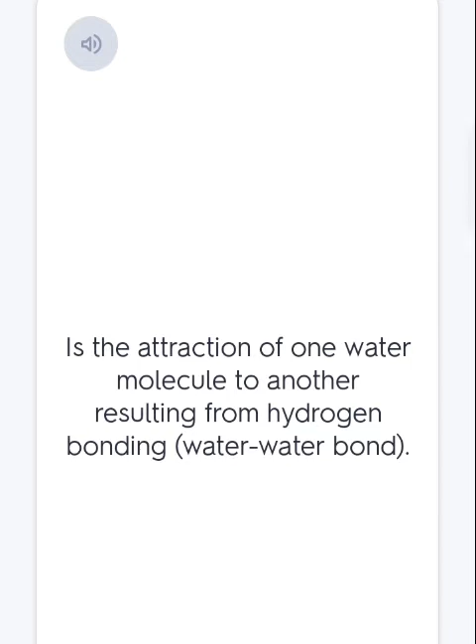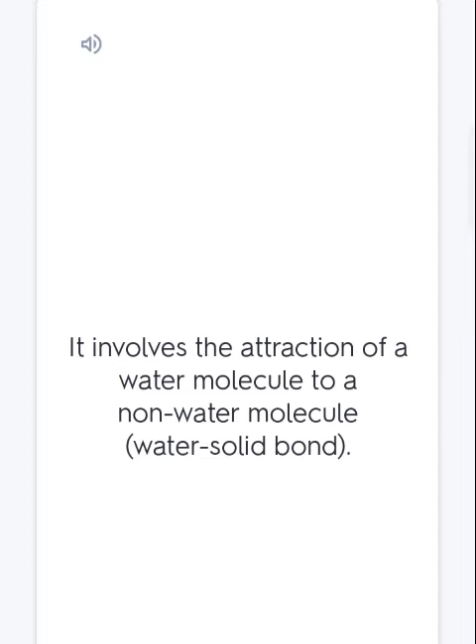Cohesion is the attraction of one water molecule to another resulting from hydrogen bonding. Adhesion: it involves the attraction of a water molecule to a non-water molecule. Stickiness: the capacity of soil to adhere to other objects. It is estimated at moisture content that displays maximum adherence between thumb and forefinger.

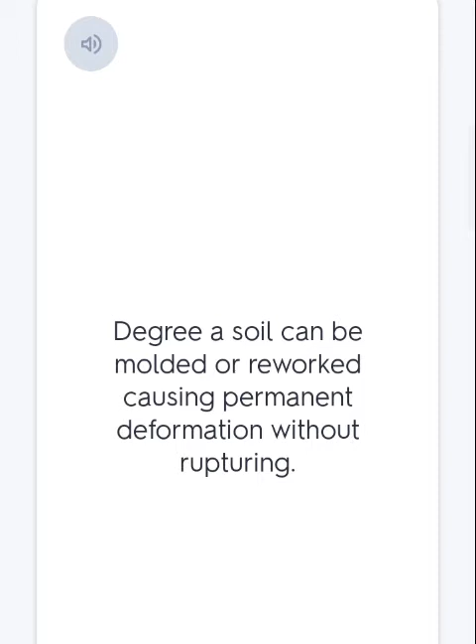Plasticity: degree soil can be molded or reworked, causing permanent deformation without rupturing. Atterberg's limits are the limits of water content used to define soil behavior. Liquid limit is defined as a moisture content at which soil begins to behave as a liquid material and begins to flow.

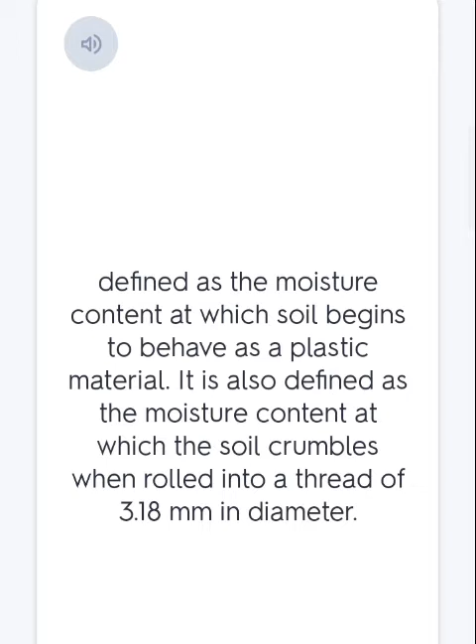Plastic limit is defined as a moisture content at which soil begins to behave as a plastic material. It is also defined as a moisture content at which the soil crumbles when rolled into a thread of 3.18 mm in diameter. Shrinkage limit is defined as a moisture content at which no further volume change occurs. Plasticity index is the difference between the liquid limit and plastic limit of a soil.

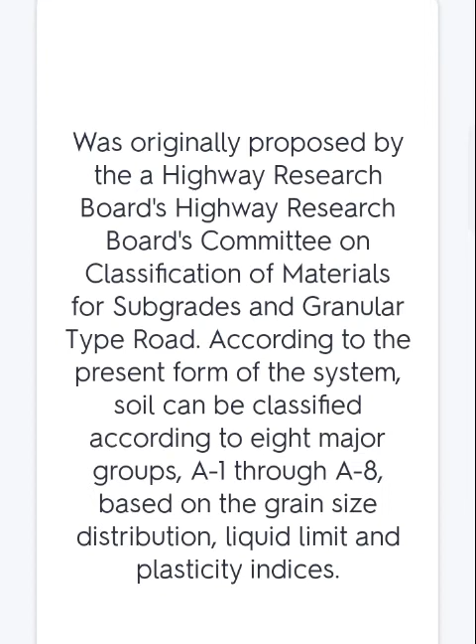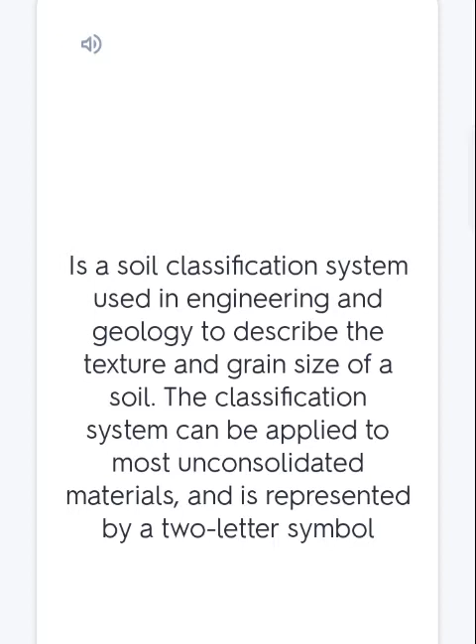AASHTO system. USCS system is a soil classification system used in engineering and geology to describe the texture and grain size of a soil. The classification system can be applied to most unconsolidated materials and is represented by a two-letter symbol. USDA system: it is also called the textural classification system.

Compaction is the densification of soil by removal of air, which requires mechanical energy. Optimum moisture content: the moisture content which maximizes the unit weight of a soil with a constant compactive effort. Vibroflotation: it is a technique for in situ densification of thick layers of loose granular soil deposits. Hydraulic conductivity: it is also called coefficient of permeability.

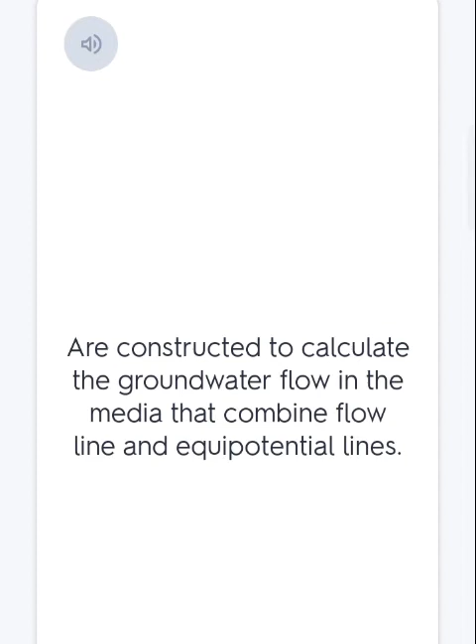The coefficient of permeability of soil depends on: A. fluid viscosity and pore size distribution, B. grain size distribution and degree of saturation, C. roughness of soil particles and degree of saturation. Flow line is a line along which water particle will travel from upstream to the downstream side in the permeable soil medium. Equipotential lines: a line along which the potential head at all points are equal. Flow nets are constructed to calculate the groundwater flow in the media that combine flow line and equipotential lines.

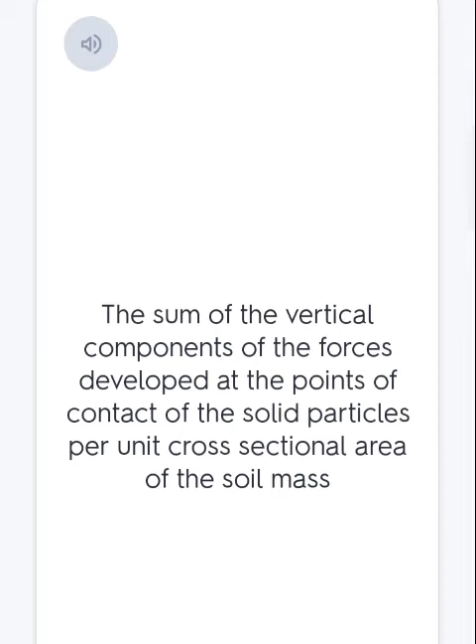Effective stress: the sum of the vertical components of the forces developed at the points of contact of the solid particles per unit cross-sectional area of the soil mass. Immediate settlement: caused by the elastic deformation of dry soil and of moist and saturated soils without any change in the moisture content. Primary consolidation settlement: the result of volume change in saturated cohesive soils because of the expulsion of water that occupies the void spaces. Secondary consolidation settlement: the result of the plastic adjustment of soil fabrics.

Overconsolidation ratio: ratio of pre-consolidation pressure to present effective overburden pressure. Shear strength: the internal resistance per unit area of the soil mass to resist failure and sliding along any plane. Virgin consolidation curve: it is approximately a straight line on a semi-logarithmic plot as shown in the consolidation characteristics of normally consolidated clay of low to medium sensitivity. It occurs when slope is equal to Cc. Coefficient of consolidation generally decreases as the liquid limit of soil increases and its range of variation is rather wide.

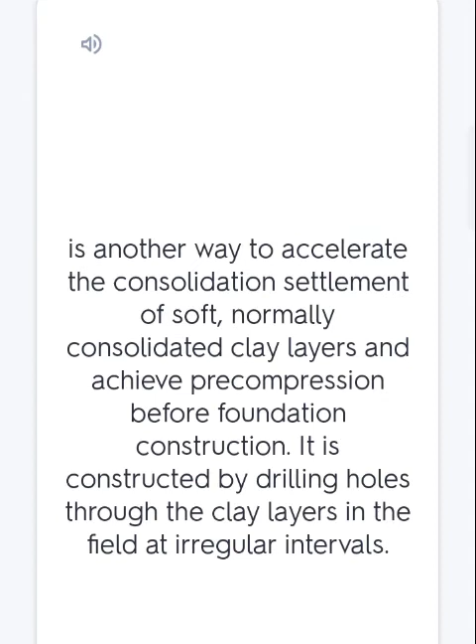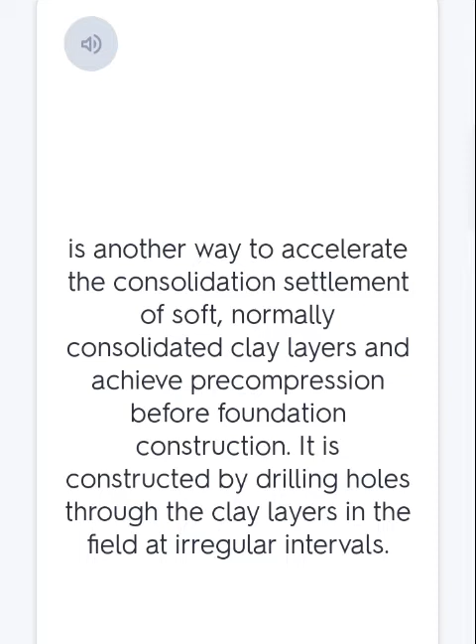Sand drain is another way to accelerate the consolidation settlement of soft, normally consolidated clay layers and achieve precompression before foundation construction. It is constructed by drilling holes through the clay layers in the field at irregular intervals. French drain: it is also known as a sub-drain, a perforated pipe designed to pull excessive water from soil and away from areas such as house foundations.

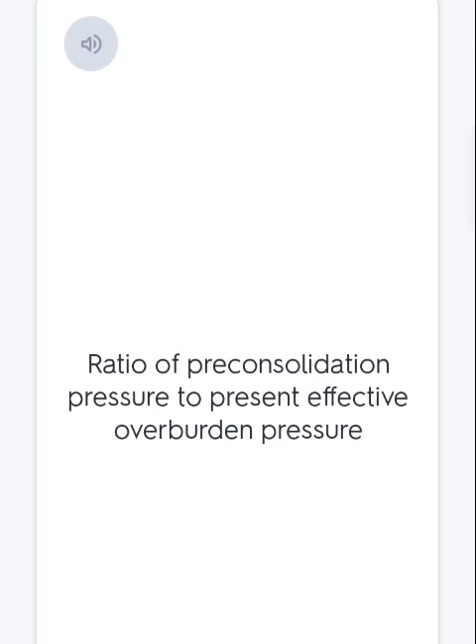Immediate settlement: caused by the elastic deformation of dry soil and of moist and saturated soils without any change in the moisture content. Primary consolidation settlement: the result of volume change in saturated cohesive soils because of expulsion of water that occupies the void spaces. Over-consolidation ratio: ratio of pre-consolidation pressure to present effective overburden pressure. Shear strength: the internal resistance per unit area of the soil mass to resist failure and sliding along any plane.

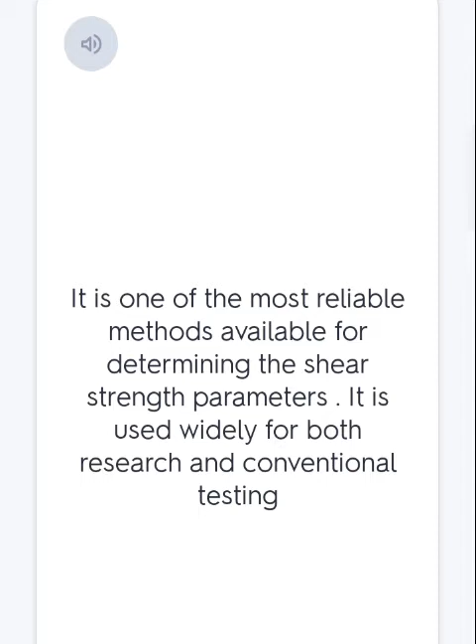Virgin consolidation curve: it is approximately a straight line on a semi-logarithmic plot as shown in the consolidation characteristics of normally consolidated clay of low to medium sensitivity. It occurs when slope is equal to Cc. Coefficient of consolidation generally decreases as the liquid limit of soil increases and its range of variation is rather wide. Triaxial shear test: it is one of the most reliable methods available for determining the shear strength parameters. It is used widely for both research and conventional testing.

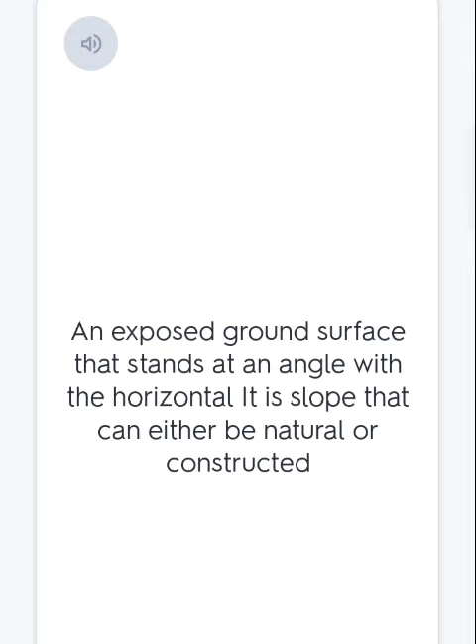Direct shear test: it is the oldest and simplest form of shear test arrangement. The test equipment consists of a metal shear box in which the soil specimen is placed. Unrestrained slope: an exposed ground surface that stands at an angle with the horizontal; it is a slope that can either be natural or constructed. Slope stability analysis.

It is an analysis which involves determining and comparing the shear stress developed along the most likely rupture surface with shear strength of the soil. Base failure. It is a type of failure that occurs in such a way that the surface of sliding passes at a distance below the toe of the slope. Slope failure. It is a type of failure that occurs in such a way that the surface of sliding intersects the slope or above its toe.

Toe circle. It is a failure circle in the case of slope and occurred when it passes through the toe of the slope. Slope circle. It is a failure circle in the case of slope failure and occurred when it passes above the toe of the slope. Midpoint circle. It is a failure circle in the case of base failure.

Method of slices. It is a method for analyzing the stability of a slope in 2 dimensions. The sliding mass above the failure surface is divided into a number of slices. The forces acting on each slice are obtained by considering the mechanical equilibrium for the slices. Bishop's simplified method of slices. It is a method for calculating the stability of slopes. It is an extension of the method of slices by making some simplifying assumptions. The problem becomes statically determinate and suitable for hand calculations where the forces on the sides of each slice are horizontal.

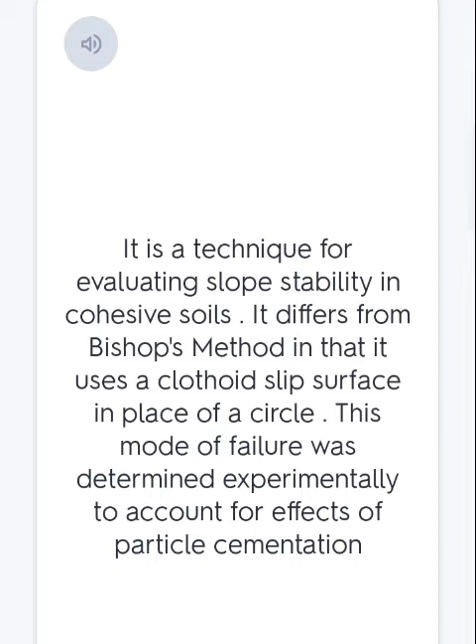Sarma method. Lorimer's method. It is a technique for evaluating slope stability in cohesive soils. It differs from Bishop's method in that it uses a clothoid slip surface in place of a circle. This mode of failure was determined experimentally to account for effects of particle cementation. Michalowski solution. It uses the kinematic approach of limit analysis similar to ordinary methods of slices.

Subsurface exploration. The process of identifying the layers of deposits that underlie a proposed structure and their physical characteristics. Auger boring. It is the simplest method of making exploratory boreholes which can use hand tools. Wash boring. It is another method of advancing boreholes which uses a casing about 2 to 3 meters long driven into the ground. The soil inside the casing is then removed using a chopping bit attached to a drilling rod.

Rotary drilling. It is a procedure by which rapidly rotating drilling bits attached to the bottom of drilling rods cut and grind the soil and advance the borehole. It can be used in clay, sand and rocks. Percussion drilling. It is an alternative method of advancing a borehole, particularly through hard soil and rock. It also requires casing.

Split spoon sampler. It can be used in the field to obtain soil samples that are generally disturbed but still representative. It consists of a steel driving shoe, a steel tube that is split longitudinally in half, and a coupling at the top. Spring core catcher. It is a device placed inside the split spoon to ease the sample recovery when the material encountered in the field is fine sand below the water surface.

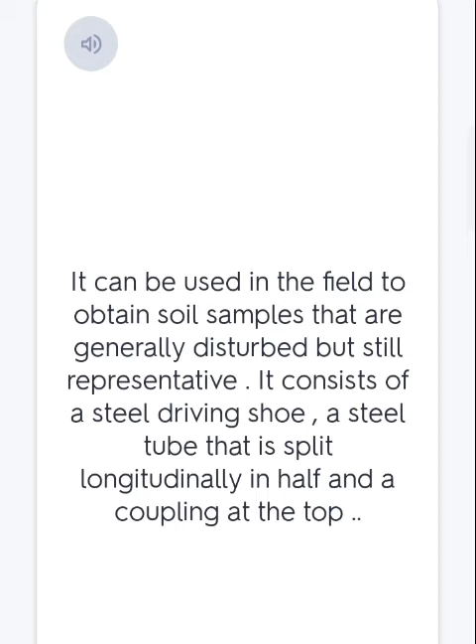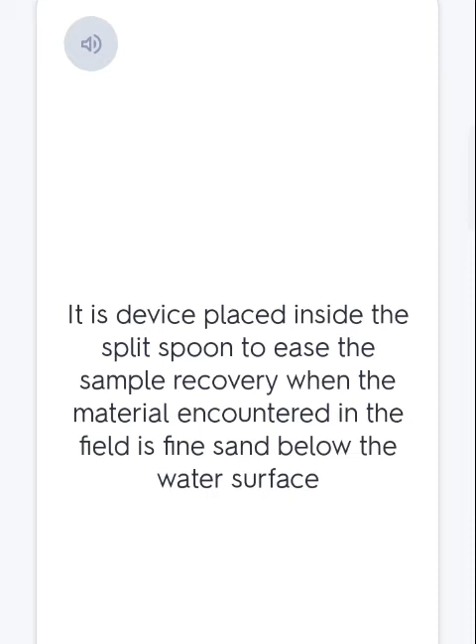Split spoon sampler. It can be used in the field to obtain soil samples that are generally disturbed but still representative. It consists of a steel driving shoe, a steel tube that is split longitudinally in half, and a coupling at the top. Spring core catcher. It is a device placed inside the split spoon to ease the sample recovery when the material encountered in the field is fine sand below the water surface. Thin wall tubes. They are sometimes called Shelby tubes, which are made of seamless steel tube and are commonly used to obtain undisturbed clay soil.

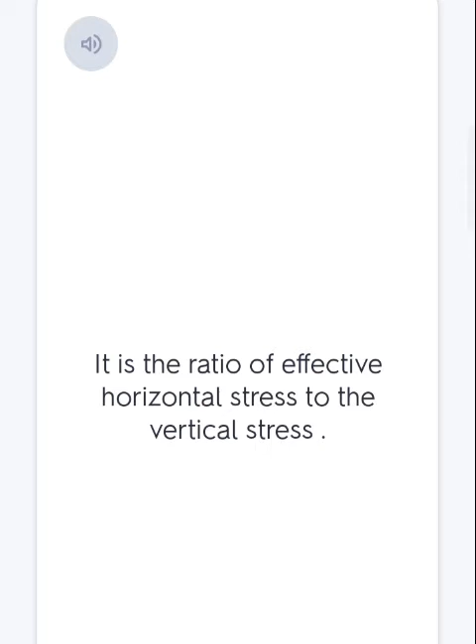Cone penetration test, Dutch cone penetration test, static penetration test. It is a versatile sounding method that can be used to determine the material in a soil profile and estimate their engineering properties. Pressuremeter test. It is an in-situ test conducted in a borehole. It was originally developed by Menard to measure the strength and deformability of soil. Coefficient of earth pressure at rest. It is the ratio of effective horizontal stress to the vertical stress. Plastic equilibrium. It refers to the condition in which every point in a soil mass is on the verge of failure.

Lateral earth pressure. It is a pressure that soil exerts against a structure in a sideways, mainly horizontal direction. The common applications of its theory are for the design of ground engineering structures such as retaining walls, basements, tunnels, and to determine the friction on the sides of deep foundations. Active state. The state occurs when a soil mass is allowed to relax or move outward to the point of reaching the limiting strength of the soil. That is, the soil is at the failure condition in extension. Thus it is the minimum lateral soil pressure that may be exerted. Passive state. The state occurs when a soil mass is externally forced to the limiting strength of the soil in compression. It is the maximum lateral soil pressure that may be exerted. Rankine's theory.

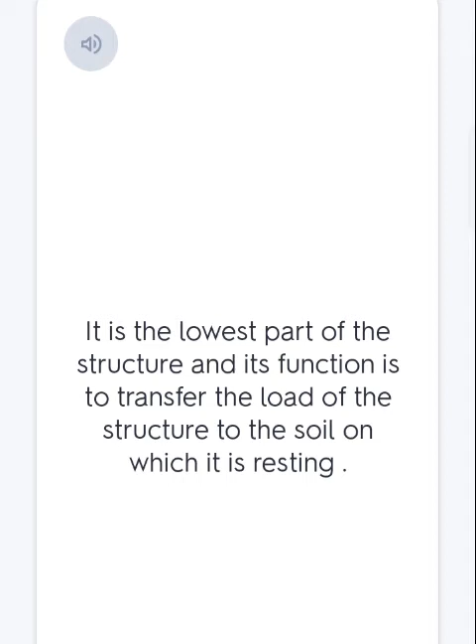Rankine's theory. Foundation: it is the lowest part of the structure and its function is to transfer the load of the structure to the soil on which it is resting.

Spread footing: it is simply an enlargement of a load-bearing wall or column that makes it possible to spread the load of the structure over a large area of the soil.

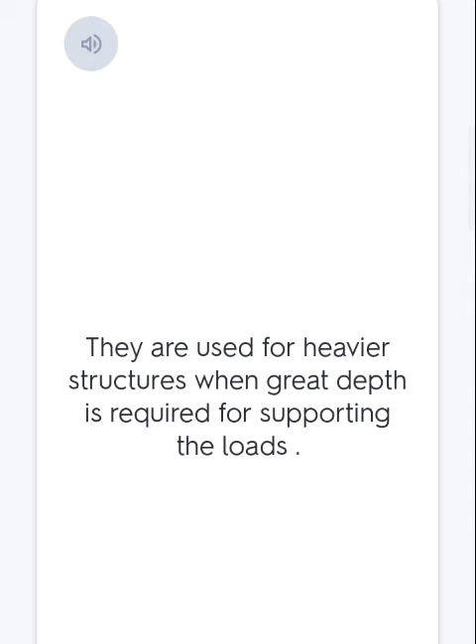Pile and drilled shaft foundation: they are used for heavier structures when great depth is required for supporting the loads. Pile: a structural member made of concrete, timber, or steel that transmits the load of the superstructure to the lower layers of the soil.

Terzaghi: he was the first to present a comprehensive theory for evaluating the ultimate bearing capacity of rough shallow foundations. According to his theory, the foundation is shallow if its depth is less than or equal to the width of the foundation.

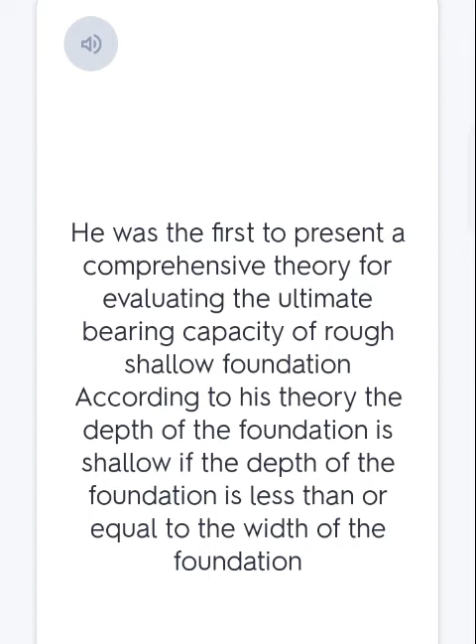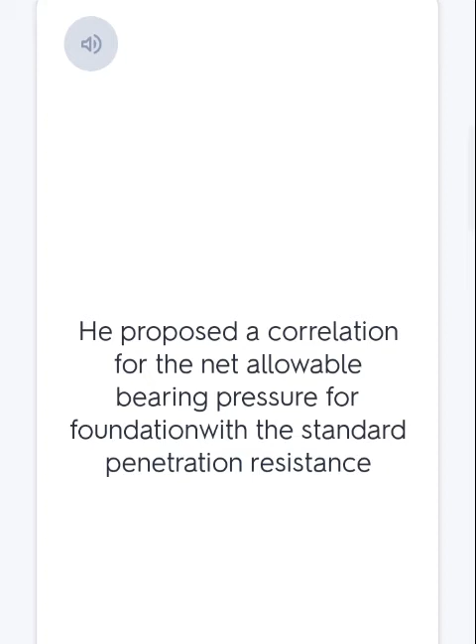Meyerhof: he proposed a correlation for the net allowable bearing pressure for foundations with the standard penetration resistance. Mat foundation: a type of foundation also referred to as a raft foundation. It is a combined footing that may cover the entire area under a structure supporting several columns and walls.

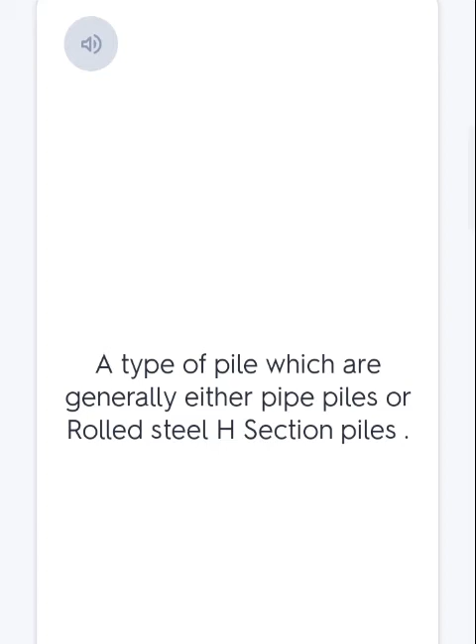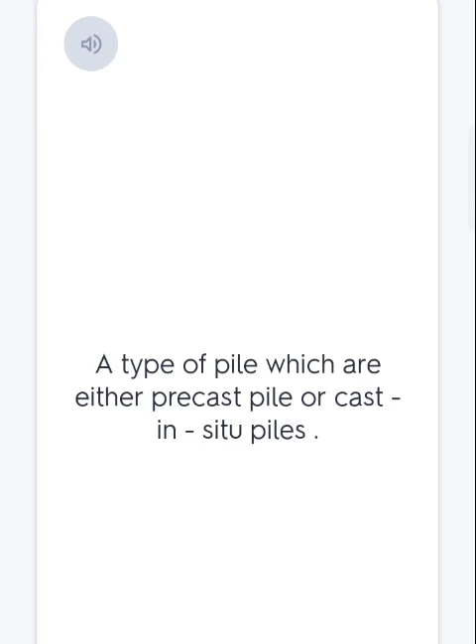Steel pile: a type of pile which is generally either a pipe pile or a rolled steel H-section pile. Concrete pile: a type of pile which is either a precast pile or a cast-in-situ pile. Timber pile: a type of pile made of tree trunks that have their branches and bark carefully trimmed off. The maximum length of this type of pile is 10 to 20 m.

Gravity retaining wall: a type of retaining wall constructed with plain concrete or stone masonry. They depend on their own weight and the soil resting on the masonry for stability, and it is not economical for high walls. Cantilever retaining wall: made up of reinforced concrete that consists of a thin stem and a base slab. This type of wall is economical to a height of about 8 m.

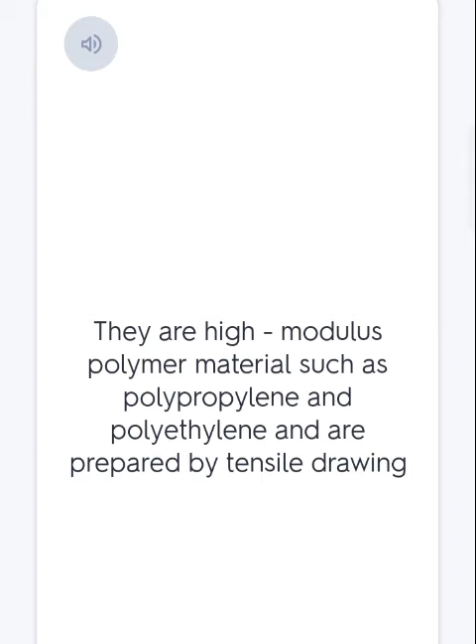Counterfort retaining wall: it is similar to a cantilever retaining wall. Its purpose is to reduce the shear and the bending moments. Non-biodegradable fabrics: they are called geotextiles. Geogrids: high modulus polymer materials such as polypropylene and polyethylene, prepared by tensile drawing.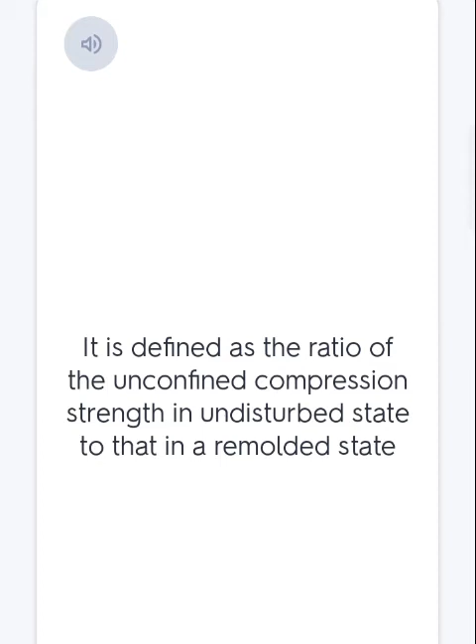Degree of sensitivity: defined as the ratio of the unconfined compression strength in the undisturbed state to that in a remolded state. Bishop and Morgenstern's solution, Spencer's solution, Cousins' solution, Michalowski's solution: the solutions developed in the past for stability analysis of a simple slope with steady-state seepage.

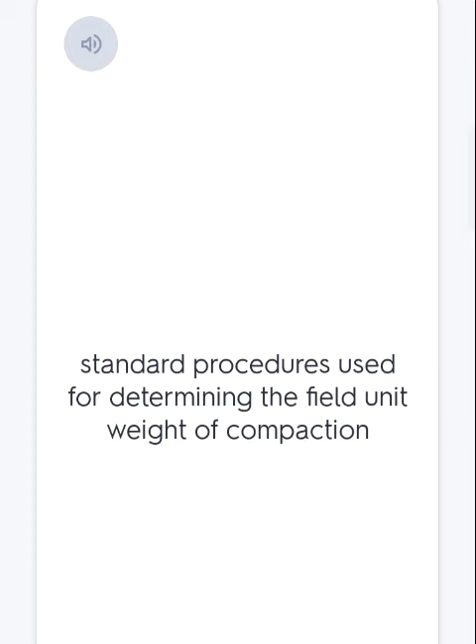Standard procedures used for determining the field unit weight of compaction: 1. Sand cone method. 2. Rubber balloon method. 3. Nuclear method. 1. Laminar flow zone. 2. Transition zone. 3. Turbulent flow zone: regions found on the analysis of the variation of hydraulic gradient.

Coulomb's theory: a theory for active and passive earth pressure against a retaining wall. The proponent assumed that the failure surface is plane. The wall friction was taken into consideration. It was presented in 1776. Hydraulic jump: an abrupt rise in water surface which results from retarding water flowing at the lower stage.

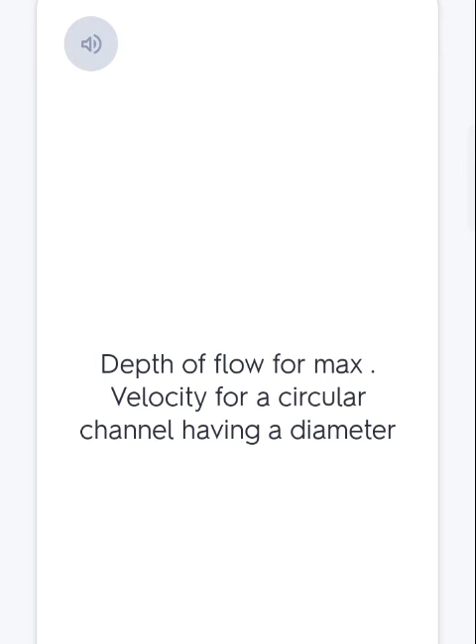0.81 d: depth of flow for max velocity for a circular channel having a diameter d. 0.938 d: depth of flow for max discharge for a circular channel having a diameter d. Section having the smallest wetted perimeter: most efficient section of an open channel with given slope, area, and roughness factor.

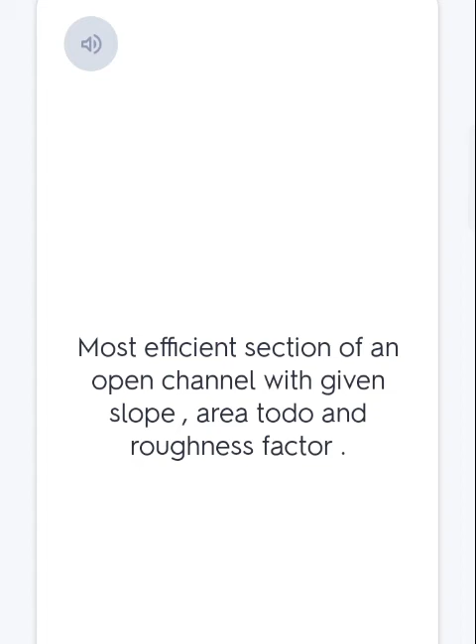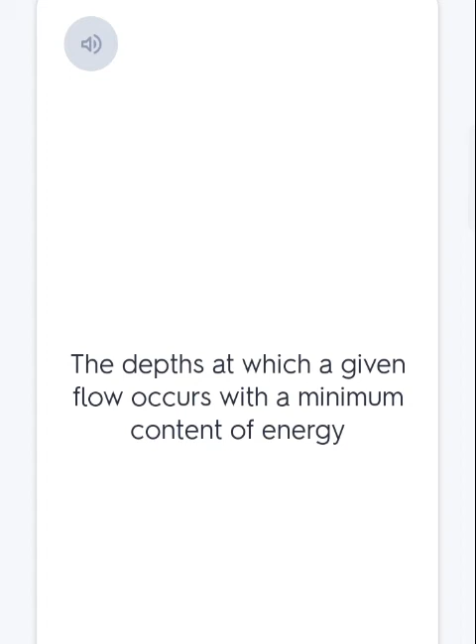Critical depth. It is a depth at which for a given total head the discharge is maximum. Critical depth. The depth at which a given flow occurs with a minimum content of energy. E equals 3/2 dc. Min specific energy of an open rectangular channel with critical depth dc.

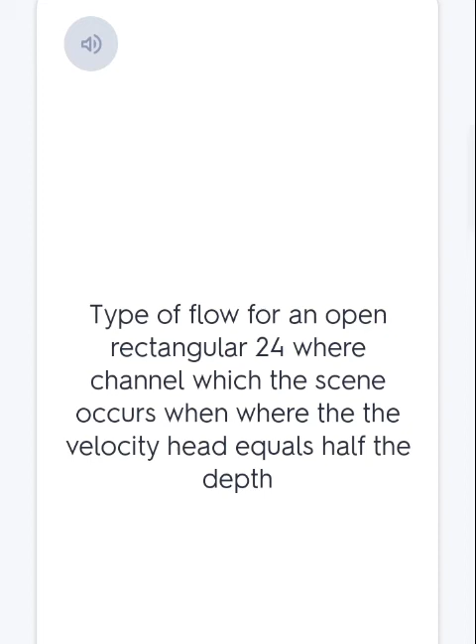Flow at lower stage. The flow of an open rectangular channel which occurs when the velocity head is greater than half the depth. Flow at critical depth. Type of flow for an open rectangular channel which occurs when the velocity head equals half the depth. Flow is at upper stage. The flow of an open rectangular channel which occurs when the velocity head is less than half the depth.

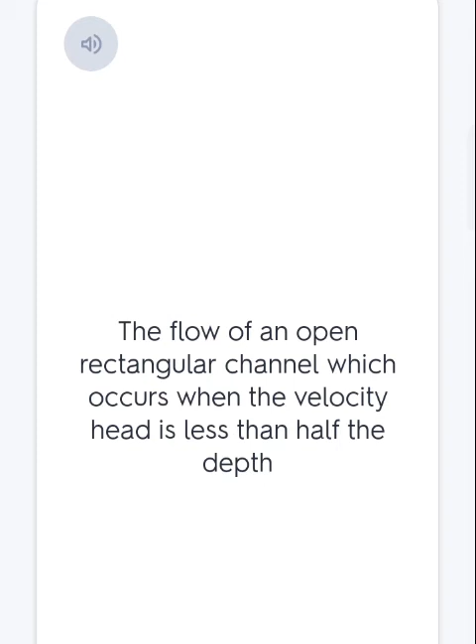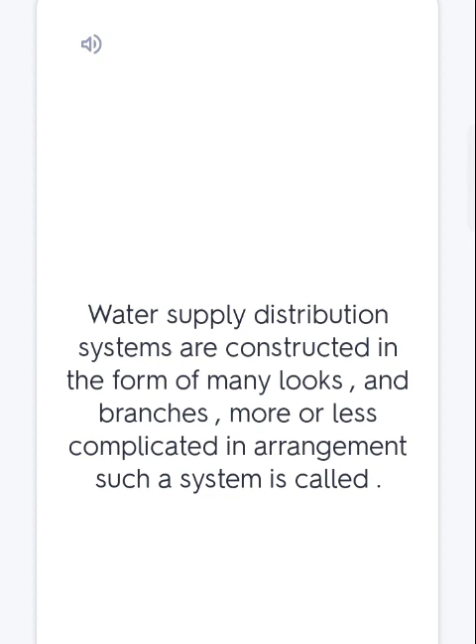Network. Water supply distribution systems are constructed in the form of many loops and branches. More or less complicated in arrangement, such a system is called. Chezy formula. The formula for velocity of flow in terms of hydraulic radius of a conduit and slope of the energy gradient is called.

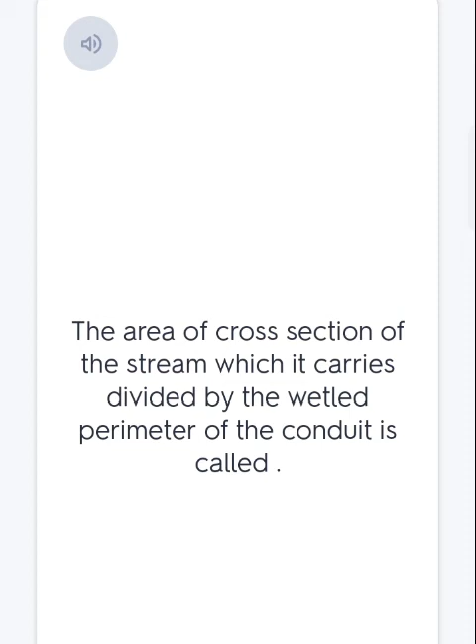Wetted perimeter. In any conduit, the line of intersection of its wetted surface with a cross-sectional plane is called. Hydraulic radius. The area of cross-section of the stream which it carries divided by the wetted perimeter of the conduit is called. d/4. The hydraulic radius of a circular conduit having diameter d, flowing full or half.

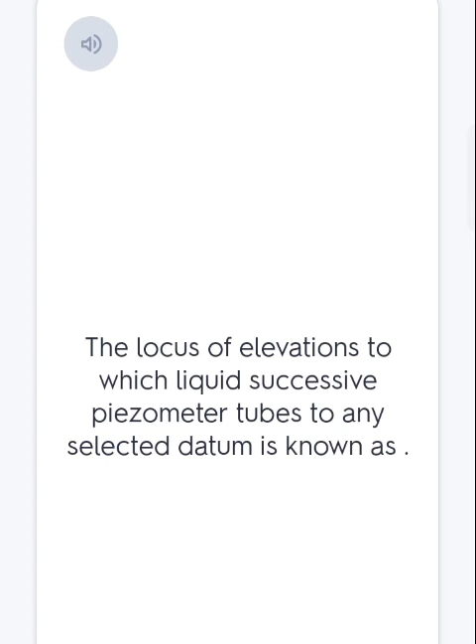Velocity head. The difference between energy gradient and hydraulic gradient is called. Hydraulic gradient. The locus of elevations to which liquid rises in successive piezometer tubes above any selected datum is known as. Velocity head. The energy gradient is above the hydraulic gradient by an amount equal to.

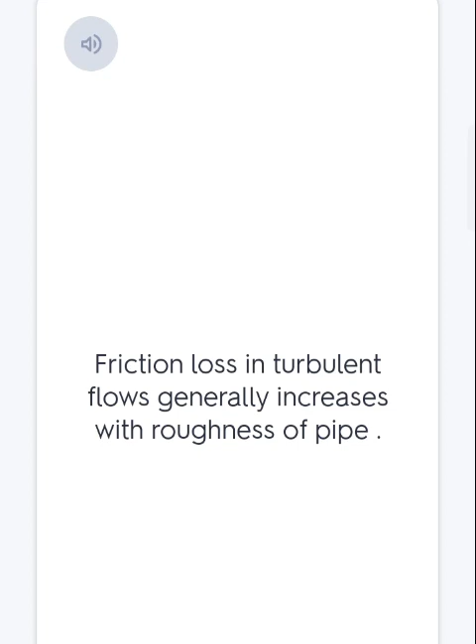Diameter of the pipe increases. For any given velocity of flow, the value of friction factor f is seen to decrease as. Relative roughness. The ratio of the magnitude of the surface irregularities to the pipe diameter is known as. Friction loss in turbulent flows generally increases with roughness of pipe. Which of the following is not true for friction in pipes? V²/2g. The kinetic energy of flowing pipes in which the velocities at all points of cross-sections are equal.

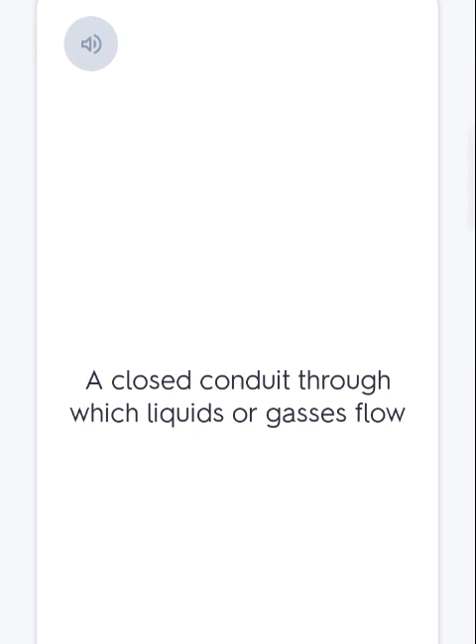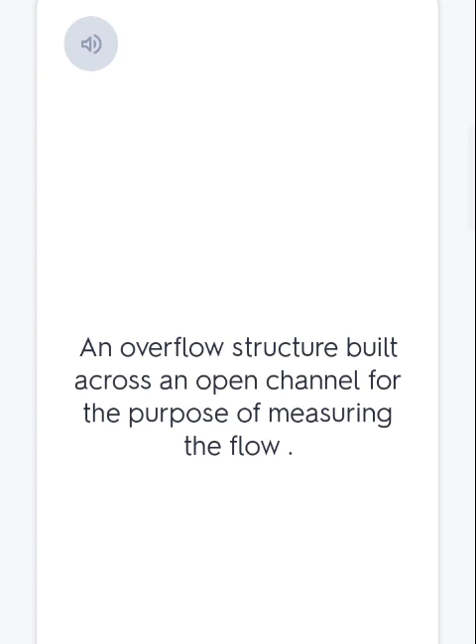Pipes. A closed conduit through which liquids or gases flow. Weir. An overflow structure built across an open channel for the purpose of measuring the flow. Coefficient of contraction. The ratio of the cross-sectional area of the jet at vena contracta to the area of the orifice is called. Torricelli. The theoretical velocity of discharge from an orifice is the velocity acquired by a body falling freely in a vacuum through a height equal to the total head on the orifice. This principle is discovered by.

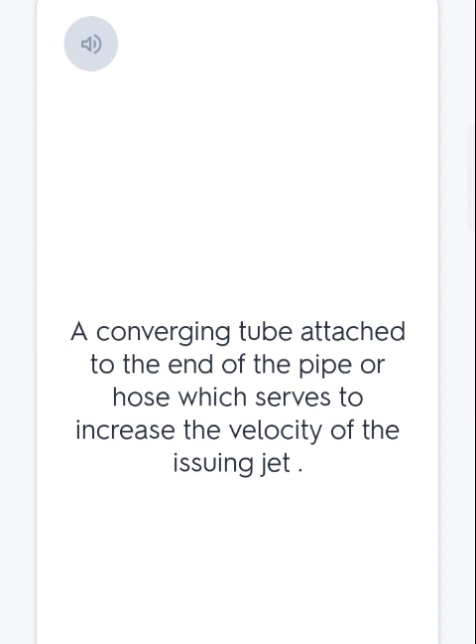Orifice. An opening with a closed perimeter through which a fluid flows is an. Nozzle. A converging tube attached to the end of the pipe or hose which serves to increase the velocity of the issuing jet. Venturi principle. The increase in kinetic energy is equal to the decrease in potential energy of a flowing pipe is called. Bernoulli's energy theorem. Neglecting friction, the total head or the total amount of energy per unit weight is the same at every point in the path of flow is known as.

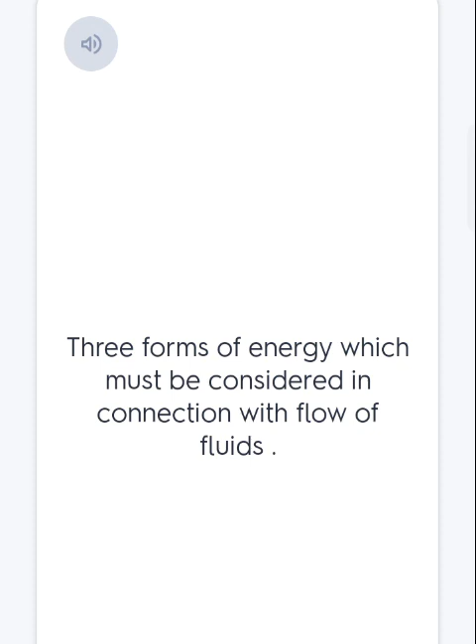Kinetic energy, elevation energy, pressure energy. Three forms of energy which must be considered in connection with flow of fluids. Continuous flow. When at any instant the number of particles passing every cross-section of the stream is the same, the flow is said to be. Uniform flow. If with steady flow in any length or reach of a stream, the average velocity at every cross-section is the same, the flow is said to be. Steady flow. If the discharge passing a given cross-section of a stream is constant with the time, the flow is said to be. Discharge. The volume of fluid passing a cross-section of a stream in unit time is called.

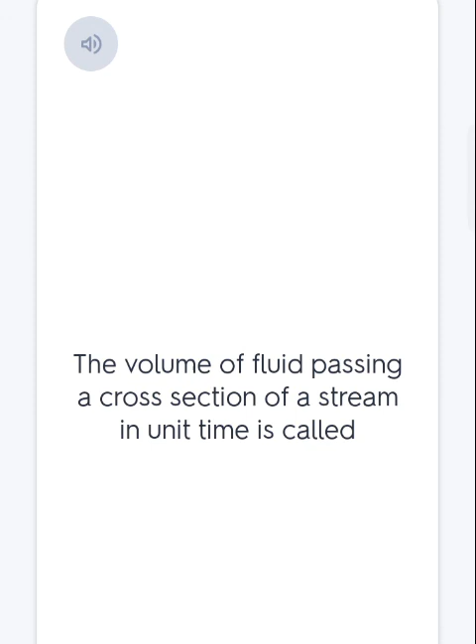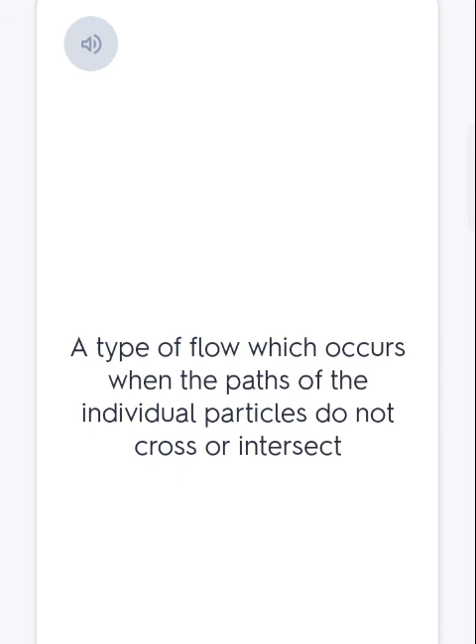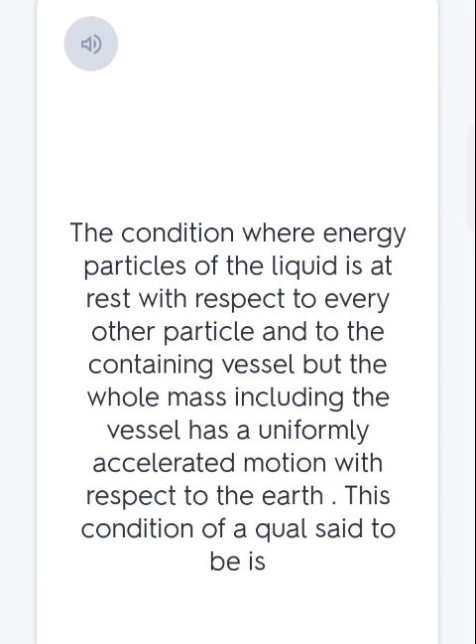Turbulent flow. A type of flow which occurs when its path lines are irregular curves which continually cross each other and form a complicated network which in the aggregate represent the forward motion of the entire stream is called. Laminar flow. A type of flow which occurs when the paths of the individual particles do not cross or intersect. Relative equilibrium. The condition where every particle of the liquid is at rest with respect to every other particle and to the containing vessel, but the whole mass including the vessel has a uniformly accelerated motion with respect to the earth. This condition is said to be. Hydrokinetics. A study which deals with liquids that are in motion with respect both to the earth and to their containers is called.

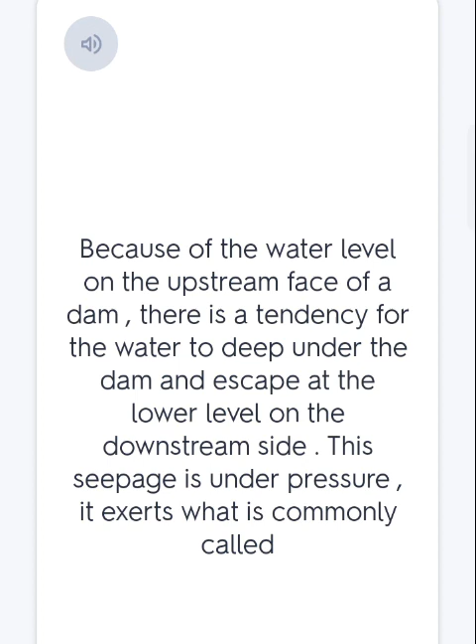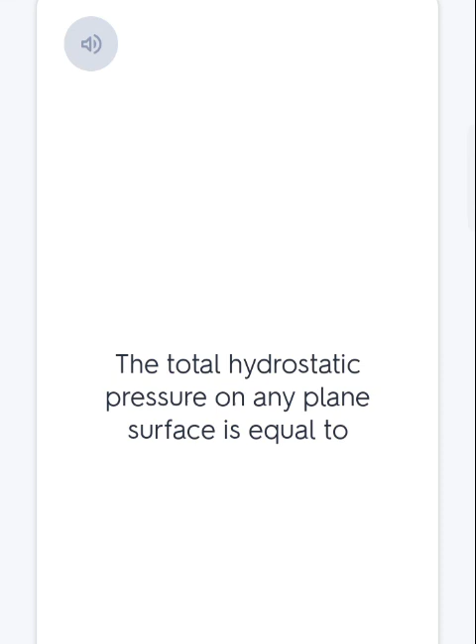Hydrostatic uplift. Because of the water level on the upstream face of a dam, there is a tendency for the water to seep under the dam and escape at the lower level on the downstream side. This seepage is under pressure. It exerts what is commonly called. Reduces seepage flow. The effects of hydrostatic uplift on a dam are the following except. Product of the area of the surface and the unit pressure at its center of gravity. The total hydrostatic pressure on any plane surface is equal to. Piezometer.